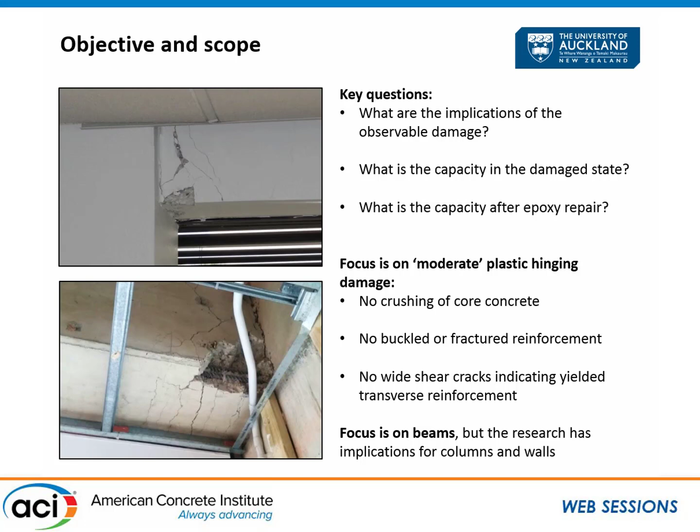I'm going to focus on beams here, but there will be a few things that relate to columns and walls. We did a test program at the University of Auckland to explore these issues: 17 identical beam specimens, beams oriented vertically just because it's easier to test that way. These beams complied with both ACI 318 as well as the New Zealand standard NZS 3101 for a ductile beam. All of these are summarized in the reference shown at the bottom there.

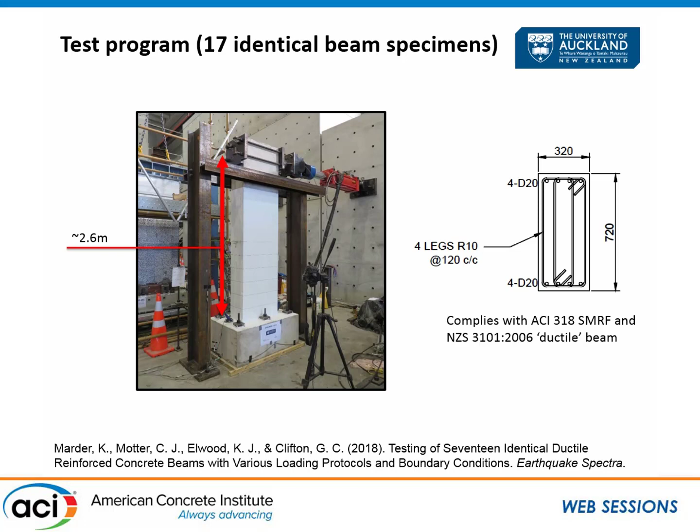We also tested some of these beams with axial restraint - most without axial restraint, but some to show the difference in behavior when there's some degree of restraint to axial elongation. This won't be the focus so much of my presentation today, but there are distinct differences in the behavior when you have that restraint.

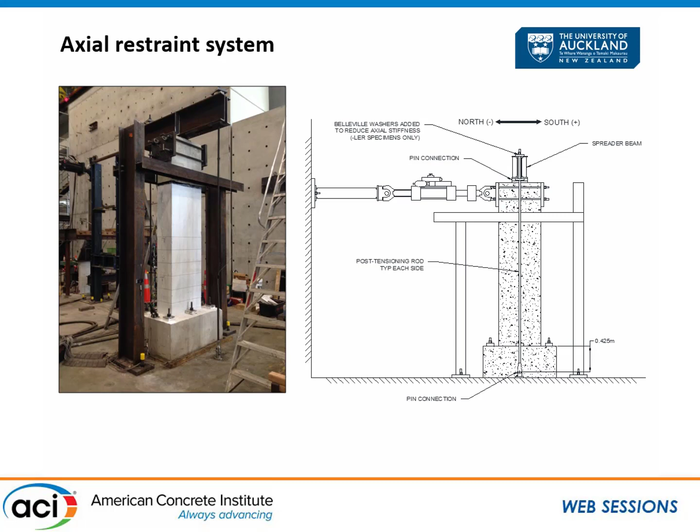One of the things we were really interested in is the effect of the loading from the prior earthquake, and the effect of different loading protocols from different earthquakes on residual capacity. So we looked at several different loading protocols - your standard cyclic type protocol, of course. But then we did several where we put in the rotation demands that a beam would have experienced during an earthquake, that's what's shown in red. And then we cycled it to failure, with all cycles being at or above the peak drift from the prior earthquake input. I note that the red inputs were done dynamically, so the right strain rate from the earthquake.

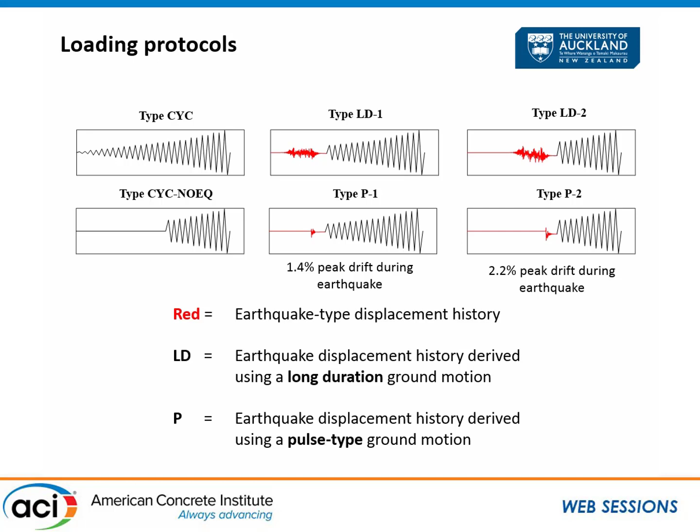We also did this test in the bottom left, called 'cyc no earthquake' - meaning what is the response of the beam without the earthquake having happened. That provided a nice benchmark for a lot of cases. We looked at both long duration earthquakes from a subduction event with lots of cycles, as well as a short, sharp pulse type earthquake, to see the difference. We took them to different drift levels, 1.4% and 2.2%. So I'll use a mixture of these 17 specimens as I go through this talk.

First, let's talk about the effect of moderate level loading cycles, up to about 2.2% or so. What we've plotted here is the monotonic response of one of the specimens - that's the solid black line - and then the cyclic protocol, with all those cycles you might expect.

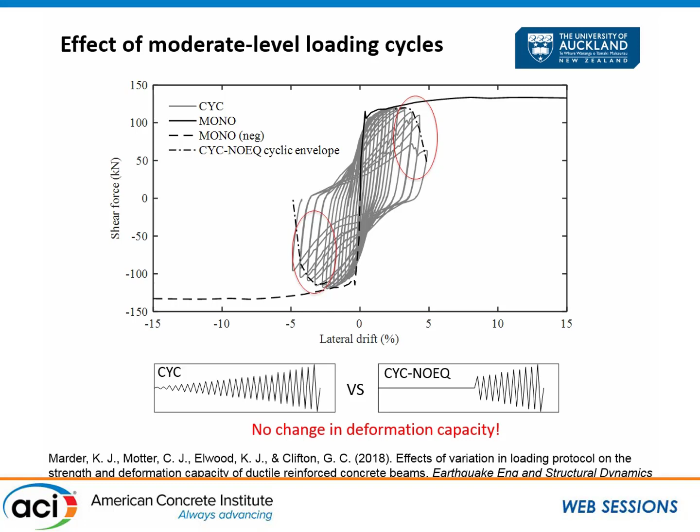And then the so-called cyc no earthquake - this is the one where we've removed all of those cycles prior to 2.2%. For that, I'm just showing the backbone, that's the dashed line there. You see it's almost a perfect match. So we conclude there's basically no change in deformation capacity for those lower level cycles. Above that, certainly, but that's still a fairly significant drift - 2.2% just on the beam hinge. I think that's quite reassuring, because there's a lot of uncertainty as to what those cycles might be in an earthquake. So for a ductile hinge, that's very reassuring.

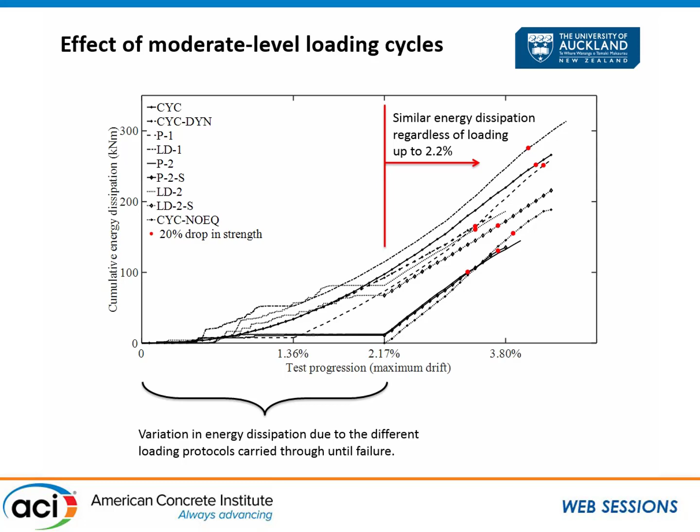We also looked at it from the point of view of energy dissipation. What we show here is the energy dissipation with the peak drift as the test progresses. The plots increase in different ways up to that 2.2% level, because those are all the different loading protocols up to that point. But they all follow the same protocol after that, and you see there's really no difference in the energy dissipation beyond 2.2%. So again, there's no real impact of those prior cycles on energy dissipation - again, that's a good outcome for us.

So now let's look at the reinforcement. There was a lot of concern in New Zealand about the strain capacity of the reinforcement that may have gone through a prior earthquake. Let me illustrate graphically the issues they're concerned with.

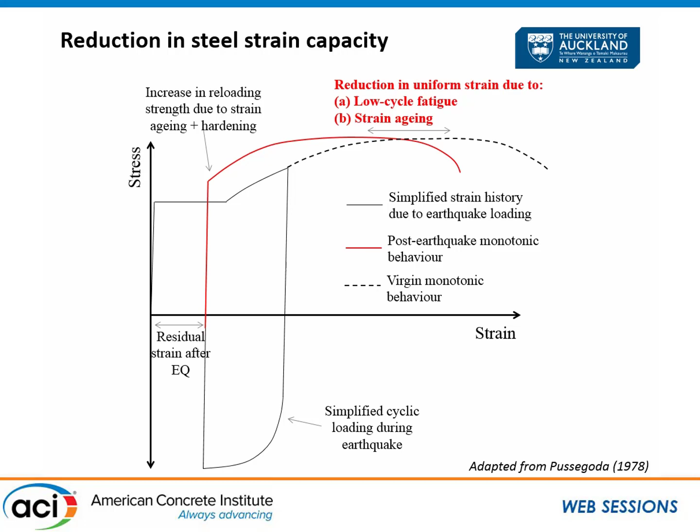Let me talk about each of these two issues, and for the most part, I have good news. We looked at reinforcement and the low cycle fatigue problem by putting bars in a clamp system and cycling them. We kept these clamps very close together to avoid buckling of the bar, because we didn't want that additional strain that comes with buckling. So it's a 4 diameter spacing of the clamps.

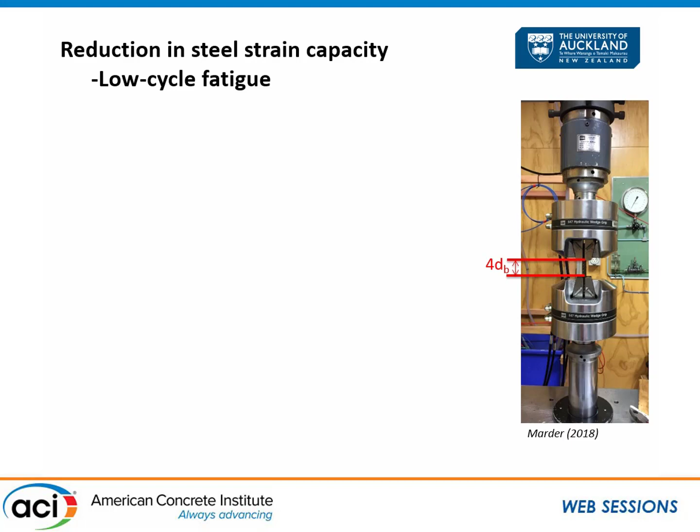We imposed the strain demands we saw in our reinforcement in the beam tests - one with a long duration earthquake, so many, many cycles - and we actually amplified this to give a higher strain demand, pushing the bar up to a strain of 6%. Then we pulled it to failure. What we see is really no difference in strain capacity, whether it's gone through those prior cycles or whether we just pull it monotonically, which is the red line. So that's good news - for a long duration earthquake, we haven't really seen a reduction in the strain capacity of this particular bar.

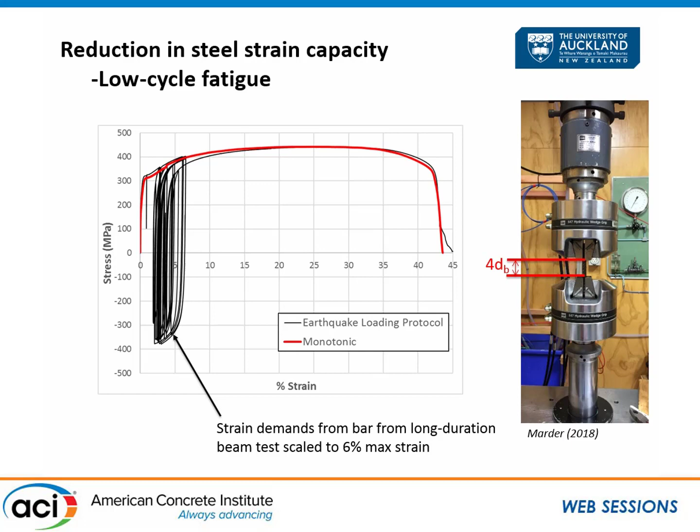Okay, so what about the strain aging issue? Here I'm showing test data from others where they've done prior straining of the bar to different levels - that's on the x-axis - then let it sit, and pulled it to failure. What's shown on the y-axis is the total strain required to go to failure. What you see is that pre-strain results in a drop in strain capacity - that's the strain aging effect, the reduction in strain capacity.

For this type of reinforcement in New Zealand, this is grade 300, so that would be somewhere around 45 KSI steel. The strain capacity of the bar is quite significant already, and even with that reduction, you're still above the limits typically applied in New Zealand guidelines for seismic assessment of existing buildings.

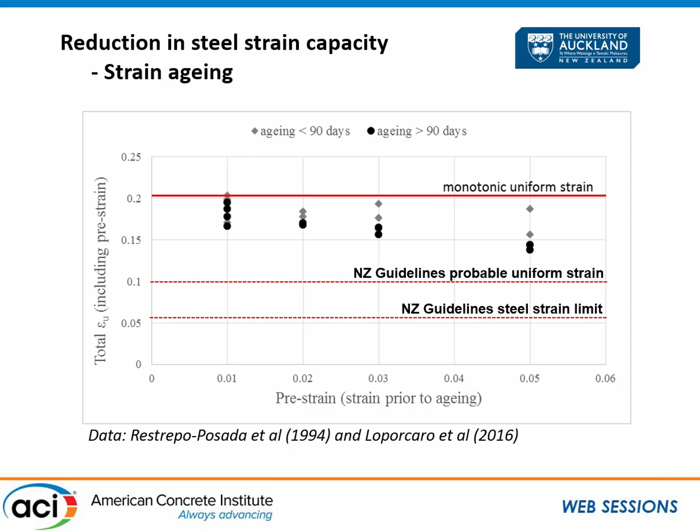So while there is a reduction, it's not a significant concern, not putting us below those limits. But what if we put strain aging and low cycle fatigue together? This is a plot showing the number of cycles to failure for different strain levels of those cycles. It's a log-log plot, I'm not very keen on those, but that's what I was given.

What we see is that for large strain cycles, you can actually see a reduction in your remaining cycles to failure by up to 50% if you have that strain aging beforehand. That's pretty significant, a drop in your number of cycles to failure of 50%.

But those are at relatively high cycle numbers. Looking at this x-axis, most of those are numbers of cycles well beyond those we're concerned about in earthquakes, and the strain levels are pretty high. A typical pulse-type ground motion will have very few of those significant cycles. A typical subduction ground motion might start putting you into the range where you might be concerned. So I think there's further research needed to really understand the expected number of cycles in different components in different earthquakes.

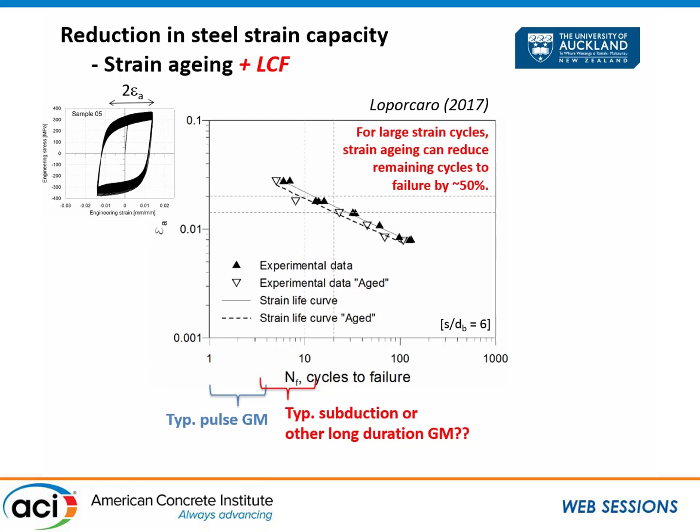But I also note that this test was done with s over d_b of 6. Here I show some photos from some of Wassim's work where he shows that you do get some curvature of the bar at s over d_b of 6, and that really puts your strain even higher. So if we were to look at our moderately damaged component, which has not seen buckling, maybe you do have tighter spacing of your transverse reinforcement, then I think we start to get away from this issue as well.

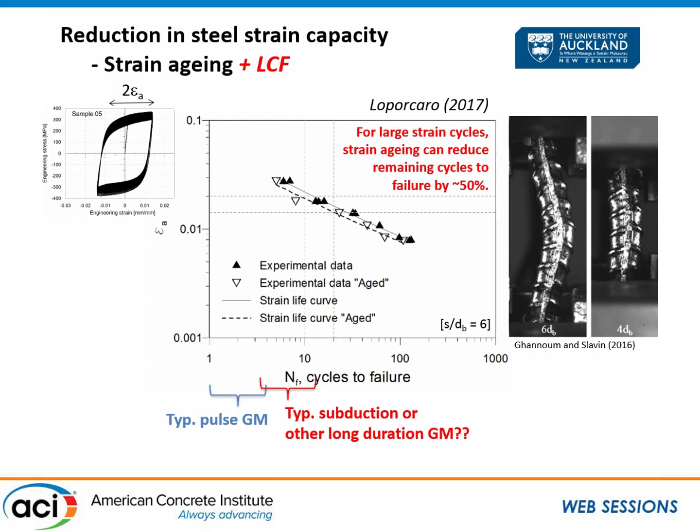Okay, so that is potentially a concern. But what does moderate damage, how much does it really reduce our residual capacity? Let me illustrate that with these four cases, three of which have gone through earthquakes to just over 2% damage, and the last one is our benchmark case of no damage and only cycles above 2%.

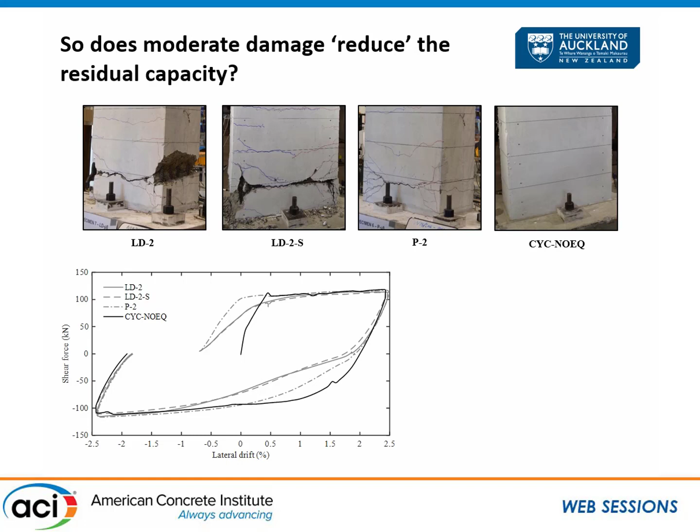And what we see is that from a strength point of view, there's really no change. I'm showing you the first cycle after having gone through the earthquakes. From a strength point of view of a ductile member, of course, there's really no change. Stiffness, absolutely - that's been highlighted by everyone so far. Significant change in stiffness. Deformation capacity is not quite captured there, but let me show you the next slide.

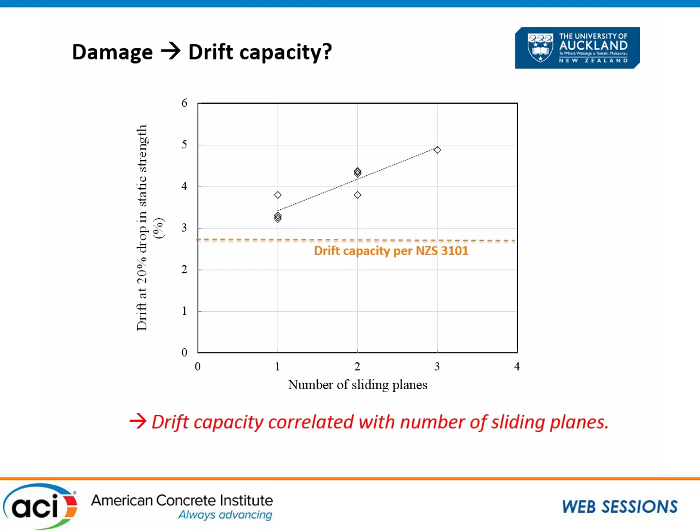And that makes sense, but note that all of those drift capacities are greater than at least what we would assess based on the New Zealand standard as your drift capacity of such a member. So they're still all at reasonably high levels. But what this means is that maybe the number of cracks is a good indicator for how much damage you have, or what performance you might get in a future earthquake. Number of cracks - remember that, we'll come back to that.

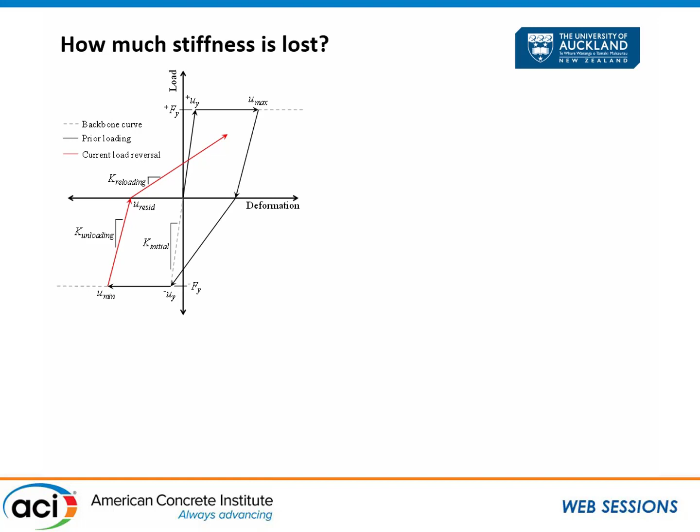How about then the key thing that you lose - that's really the stiffness. We know this, of course, from past research, typical Takeda model, that on a returning cycle you've lost significant stiffness in your element. We wanted to quantify that for elements that have gone through an earthquake loading, as opposed to elements that have gone through cyclic loading. So we collected shake table test data in addition to our beams that had gone through the earthquake loading prior, and we looked at the drop - the vertical axis, if you can't see it, it's small writing - so it's the drop in stiffness compared after the earthquake compared to before.

What we see is that this is nicely bounded by a function of 1 over the ductility, which is quite a convenient, simple parameter. It gives us a conservative estimate of the drop in stiffness. You might want to drop it down further at low ductility demands, between 1 and 2, because that's where you get such a steep drop in stiffness and uncertainty in really getting that ductility right.

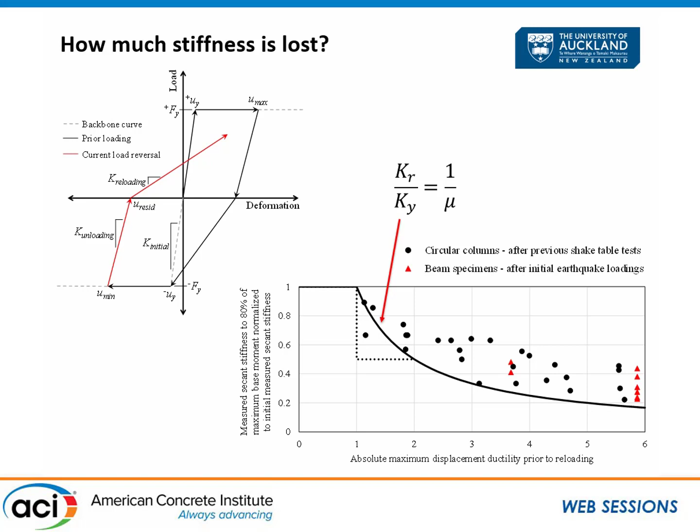But what this tells us is that we really need to know something about the peak drift demand or the peak ductility demand from the prior earthquake. So how do we estimate that peak deformation demand from the damaging earthquake? It's clearly important for our stiffness, and really there's no sense going through a detailed assessment of a damaged building if you can't understand how it performed in the first earthquake, right? So understanding that peak demand from the prior earthquake is really critical.

Most standards or procedures out there for post-earthquake assessment, including FEMA 306 that was brought up earlier, use crack widths, maximum crack widths, as their primary metric. If you look at this plot, it's looking at the peak drift from the prior earthquake versus the maximum residual crack width, and we see we really can't make a correlation there. That's largely the randomness of different earthquakes giving you different crack widths for different peak drifts.

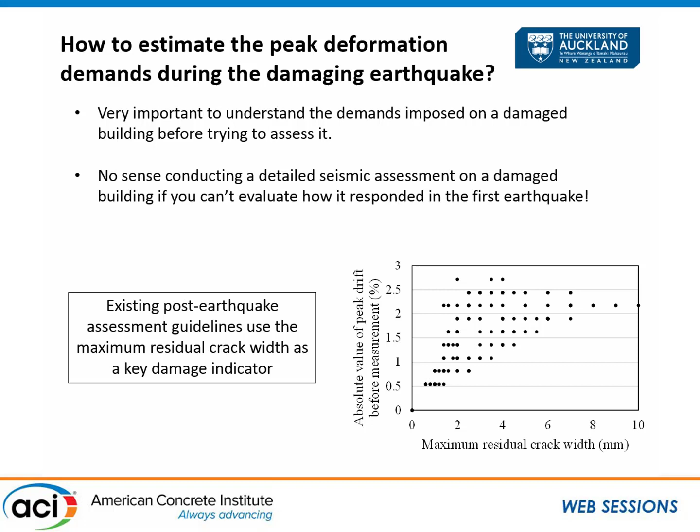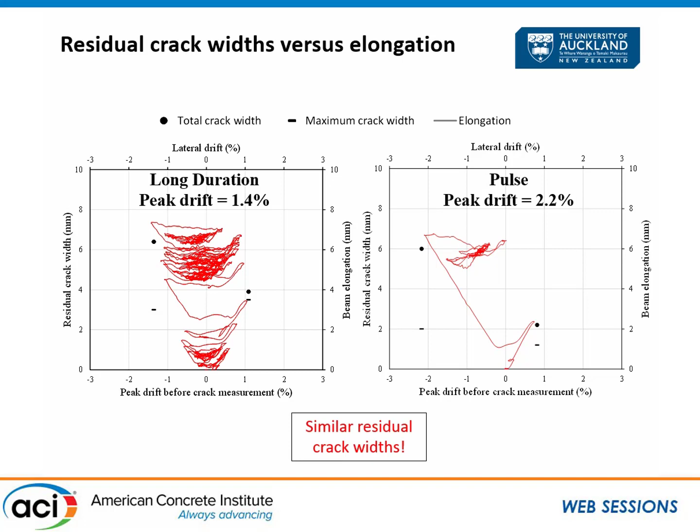If we look at two particular beam tests, one with a long duration motion, the other with a pulse motion - the long duration only taking it to a peak drift of 1.4%, while the pulse motion took it to a peak drift of 2.2% - we get the same maximum cracks and the same elongation in the beam. That has to do with the way the pulse motion affects the beam versus the way the long duration motion affects it, with growth over the number of cycles in the long duration case. So residual crack widths are not very reliable in relating to the peak drift demand the building experienced.

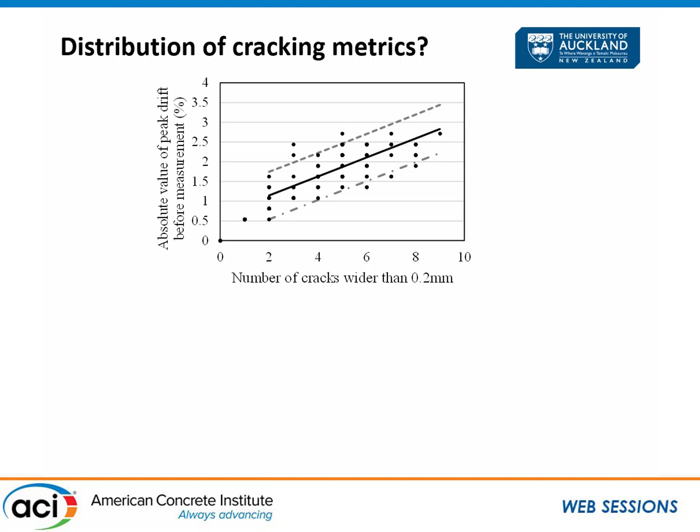So what can we do? Well, perhaps it's not so much the maximum crack widths, but more the distribution of cracking that is important. This is a plot of the number of cracks wider than 0.2 millimeters within the plastic hinge region. There's still quite a bit of scatter, but there is more of a consistent trend, and maybe we can pick a bound on that and use it as guidance to what our likely peak drift was in the prior earthquake.

What this shows us is that if we only have one crack wider than 0.2 millimeters, that's not necessarily a concern - really what it's indicating is that we didn't have that much demand. There was a concern among engineers in New Zealand that a single crack in a beam meant very large strains on the bars, and that you'd strained your bars too far because you hadn't distributed your cracks. But in fact, it may have been showing us that those particular beams didn't see large rotation demands. To determine that specifically, you need to look at your quantity of reinforcement and see if you're over minimum levels. But I caution, all of what I've been talking about here is for beams that can grow, beams that don't have axial load on them.

For columns and walls, you tend to get this response - this is plotting elongation versus drift. You always come back down to zero at zero drift, or your elongation is squashed. If your elongation is squashed at zero drift, then your cracks are also closed. So using crack widths is even more troubling for columns and walls, and I think there's some future research needed here to relate the damage to columns and walls with the peak drift demand from the prior earthquake.

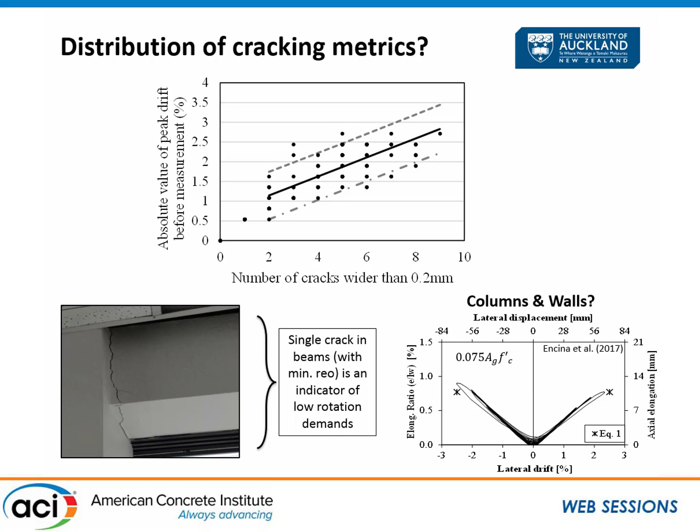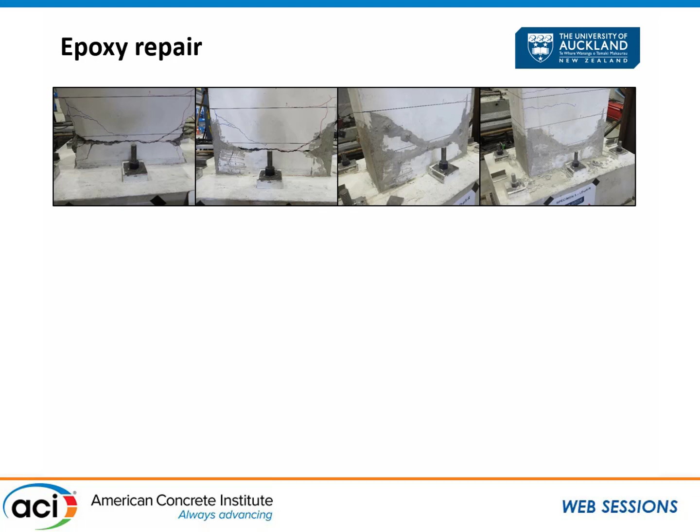So now I'll get to the repair. We did a simple epoxy repair on three of the beams, with professional help, I should say, and we were able to restore most of the stiffness. The unrepaired beam had a stiffness that was about 30% of the original beam, and the repaired beam got that back up to about 90% in this particular case.

Seeking out more data in the literature of repaired beams, there aren't many out there with very reliable data to work with, but from what we could find, we felt we could reliably get about 80% of the stiffness back. That was fairly consistent for beam specimens.

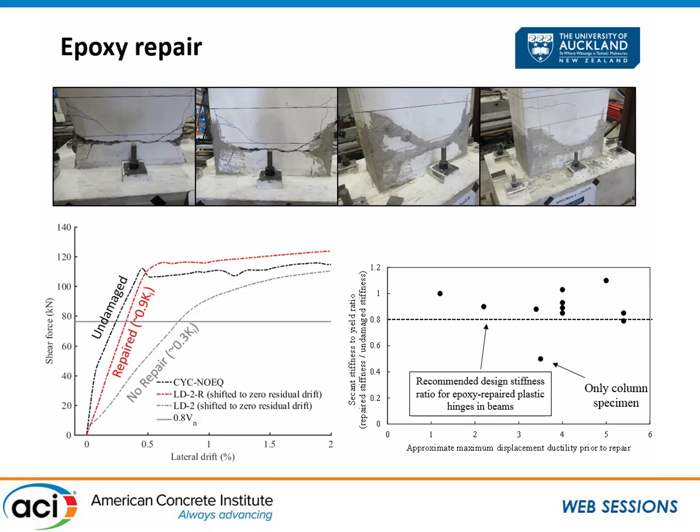That may be a concern for drift-sensitive components within your building. If you've got a softer building, you're likely to see larger drifts in aftershocks. So I think further research is necessary for columns and walls in that case.

One issue, though, is that you lock in your strain demands on your bars when you epoxy inject. So if the beam has already seen this elongation, and along with this elongation is strain in the bars, then you epoxy inject, you've locked in that strain.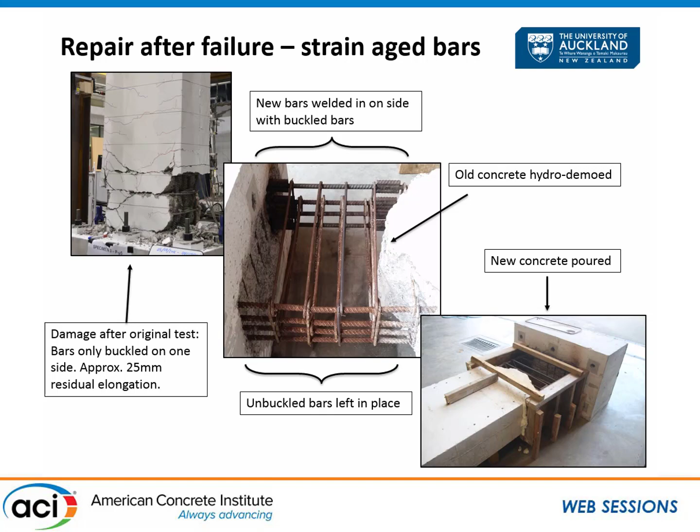So those bars had been strained, and they'd sat there for about 6 months, so they had experienced strain aging. Then we poured concrete in that new hinge region, and we tested it again to failure.

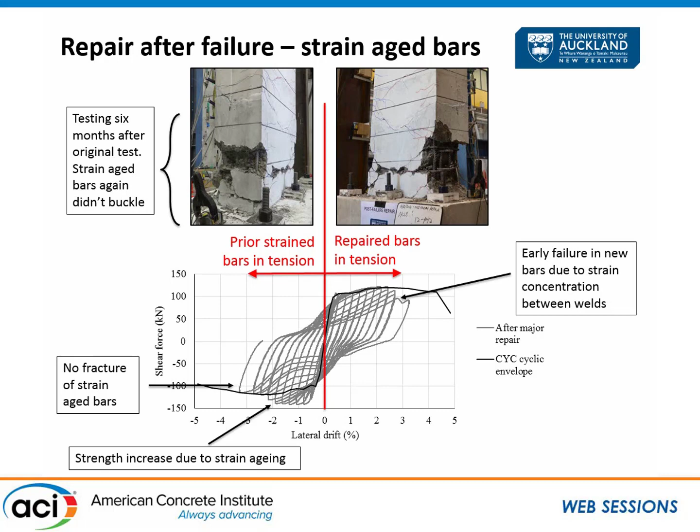And the strain-aged bars showed us the effect of strain aging in terms of the strength increase. You can see the gray hysteresis there going quite a bit higher than the original cyclic envelope, showing us that strain aging has increased the strength of those bars beyond just what the strain hardening of the prior loading would have done. But in the end, we did not fail those bars, so their strain capacity did not come into play in terms of limiting the capacity of this beam. It was really the repair technique used on the bars on the other side that limited the capacity.

So with that, I've covered a lot of material here, but just 3 points to take away: prior loading cycles below 2% have minimal impact on the drift and energy dissipation capacity of the elements; residual crack widths don't always provide a reliable estimate of your peak drift demands, so be careful about using those alone; and prior earthquake loading results in a reduction in stiffness proportional to the ductility demand, and we can recover a lot of that for beams with epoxy injection, but further work is still required for walls and columns. Thank you.